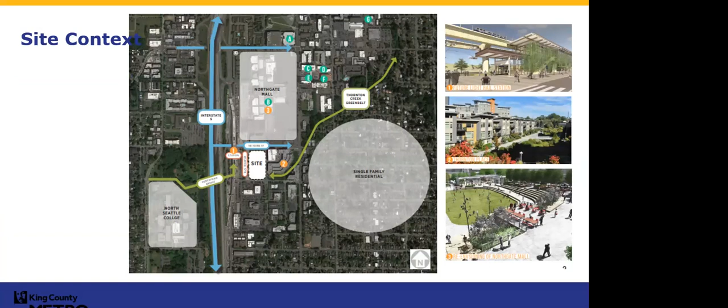Well, nothing is without bumps, I suppose, but I'll just keep going. So now that you can see what I was talking about, that sets context for the site I'm going to discuss in more detail. The King County Metro park and ride facility at Northgate is really well positioned, similar to Aljoya, because it's so close. There are a number of major development projects happening right around our project, which will really benefit the neighborhood and increase the impact that redevelopment will have on the community, which is great.

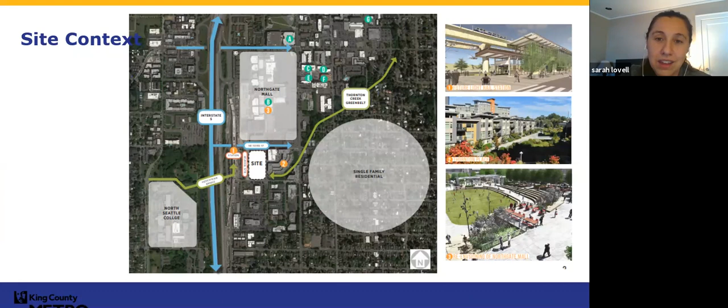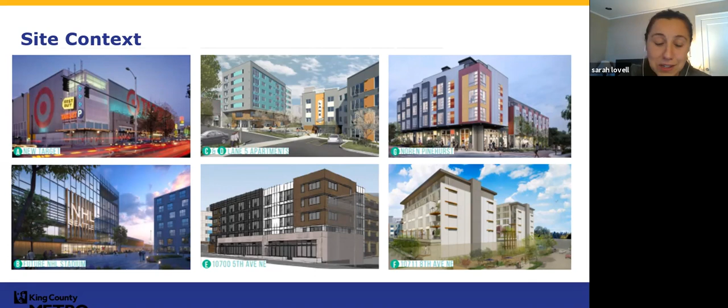Additional context - everyone's familiar with the Target, which isn't that new at this point. In addition to the Target on the other side north of the Northgate Mall, there are a number of multifamily projects very close to that Target site, just on the other side of 5th Avenue. In the bottom left corner is a picture of the NHL facility, expected to open this summer, though next fall is when a team will actually use the facility. So that's sooner than our project.

This is just a little more context setting. You'll see outlined in red is the King County Metro Park and Ride site, and the blue is the project I'm talking about today.

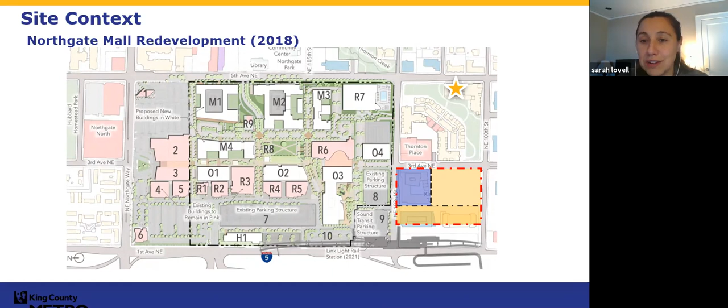Northgate for King County has undergone a number of iterations. We've issued 2 requests seeking a developer, the latest in 2018, when we had hoped to develop the entire park and ride facility. As it stands today, we're moving forward with just one of the 3 buildings for now, and we expect a phase 2 right after we finish negotiating the contract for the project I'm going to talk about in a bit.

For those who haven't seen these, GGLO put these together. This is some of the visioning exercises meant to inform how they're thinking about the Northgate redevelopment. This being right across the street from our site, we're pretty excited about it, and hopefully it will be a big benefit to everyone.

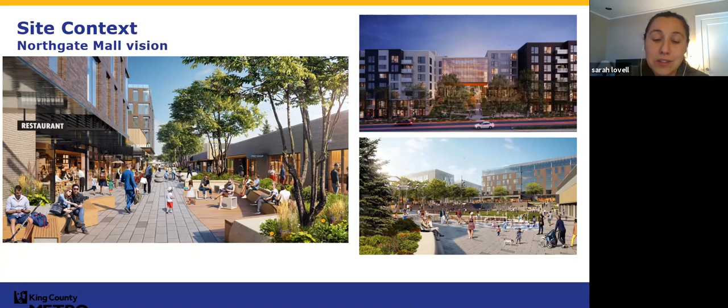I did see a few questions come my way before this presentation about green space and things like that. Quite clearly, as part of the Northgate redevelopment, there will be a lot of open space, or at least it's expected to be that way. For our project, since it's a single building, there's not as much public open space associated with it, but in phase 2 we anticipate a pedestrian promenade and other amenities. So the green space in our project is forthcoming.

The hockey facility is expected this summer. Adjacent to our site is the Northgate Link Station. Sound Transit actually purchased part of the King County parcel and has been working diligently on this project for a number of years. Service is expected to begin this fall, which will really help increase access to the larger region. Trains are expected to arrive every 8 minutes, a frequency where you don't have to look for a schedule. It'll be a 14-minute ride downtown, faster than you could expect to drive and park, which is pretty exciting.

As part of the Northgate project, Sound Transit constructed a new 450 stall garage, and King County Metro has a ground lease at Thornton Place for 300 to 350 stalls of parking. So there's a long-term vision of having roughly close to 1,000 stalls of parking at the Northgate Link Station. We do anticipate redeveloping both pieces of our current park and ride. While the new project in phase 2 will probably have its own parking, it's still open whether any of that will be additional commuter parking.

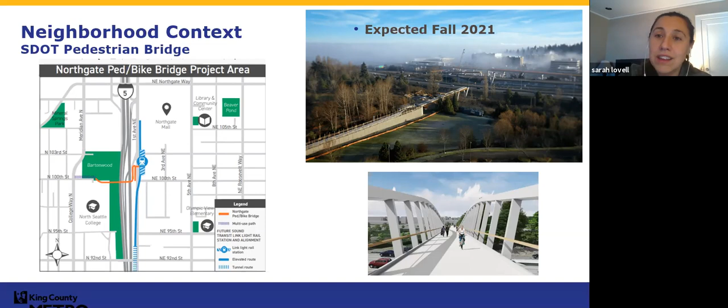And then as the transit-oriented development manager, my hope and dream would be to do something more with it. So that would be maybe a part of phase 2, but likely a phase 3.

The project I'm talking with you about today is a 232 unit mixed use building, specifically targeting households making 60% of the area median income or below. Right now the mix is 5% of units target households making 30%, another 5% target folks making 50%, and the remainder is at 60%, which is considered workforce housing.

It's a pretty cool building. It has a 10,000 square foot daycare center on the ground floor and an associated green space, which should be a really fantastic amenity to families in the area.

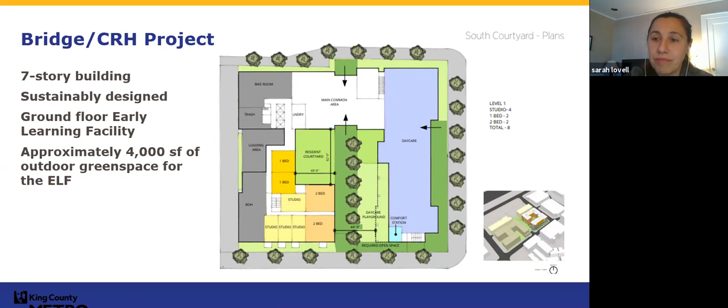As part of any of these development projects, there's always community outreach, and this is well timed, although maybe it's a little short notice. Community Roots Housing is hosting some engagement. There's a survey on their website right now where you can give feedback on the project and answer some questions, available to the public for another week. Tonight there's a Zoom meeting to talk more about the project, and there's another one Saturday afternoon the 20th. Once these two meetings pass, there will still be opportunities to engage on this project.

The schedule right now is they're very early in design. They're engaging the public to let them know that the process is picking up and they're starting. They expect to be hitting design and permitting for the entirety of 2021 and 2022. We think that once our King County Council action has taken place this summer, that's when they'll officially have site control and be able to really start investing a lot of money to get the project moving as quickly as they can.

Right now they expect to have their permits issued in the spring of 2023, and pretty much once their permits are issued, they'll begin construction. So construction is expected to take about 18 months, beginning in spring of 2023, which would put it at construction completion in late 2024.

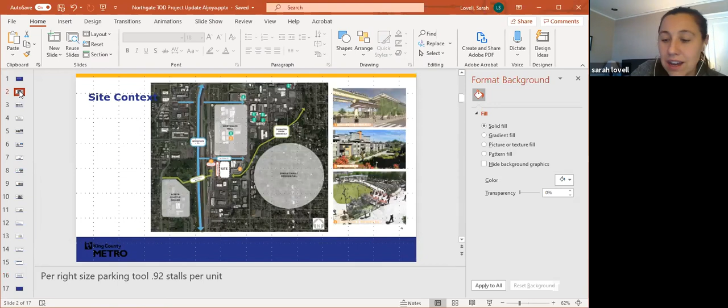In terms of where it is, let me see if I can do this—this is going to test my technical expertise, guys. I believe it's site 3 here, right at the edge is my understanding. But I was looking to confirm that last night and to be fair, I did not confirm that. I didn't see a site plan specific to the ice rink, so I can see if I can dig in and find it. This is from 2018, so it may have changed a little.

Is site 3 where the JCPenney used to be? Yes. Okay, so that should give a good example of where it might be for people.

I also want to add that we're still working on getting more information that Sarah can't provide today from Simon or other people working on the project. So if we can't answer all those questions today, we're working to get more information for everyone later. I know Simon's under construction, but I did a pretty deep dive on what was publicly available, and there wasn't much. I'm sure as dates become more crystal for them, more information will flow, but I was surprised at how little was actually publicly available for the Northgate redevelopment right now.

With that map still up, can you point at what streets are where? Sure, so this is Northeast 100th, this is 103rd, and the star is Aljoya, and this is 3rd Avenue right here.

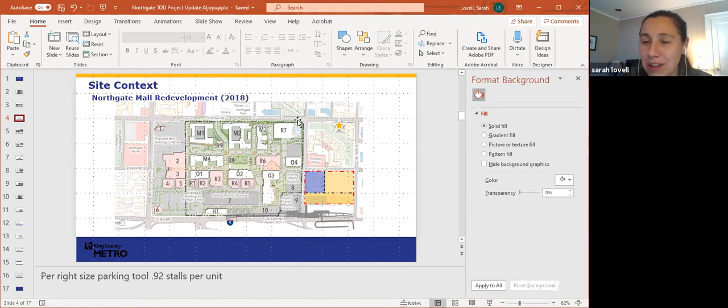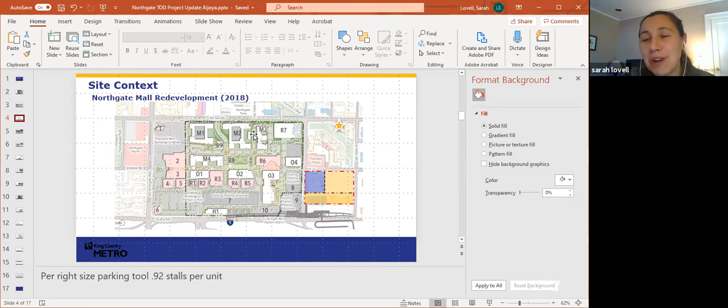This was really tricky. I did some research to see if I could get in contact with someone at Simon to get more information. We don't have a lot of good information about what they're planning in terms of specific retailers that'll be part of the Northgate redevelopment. I'm really curious too, and I know the redevelopment in its full build-out is a combination of office, retail, and residential. There are about 900 residential units that were planned at one point. But I don't know the specifics of the retailers going back into that space.

I want to say again that Aljoya has been working on getting a representative to speak further on the mall redevelopment, so maybe in a future webinar we'll have more info on that too. I apologize, I wish I had better information about that.